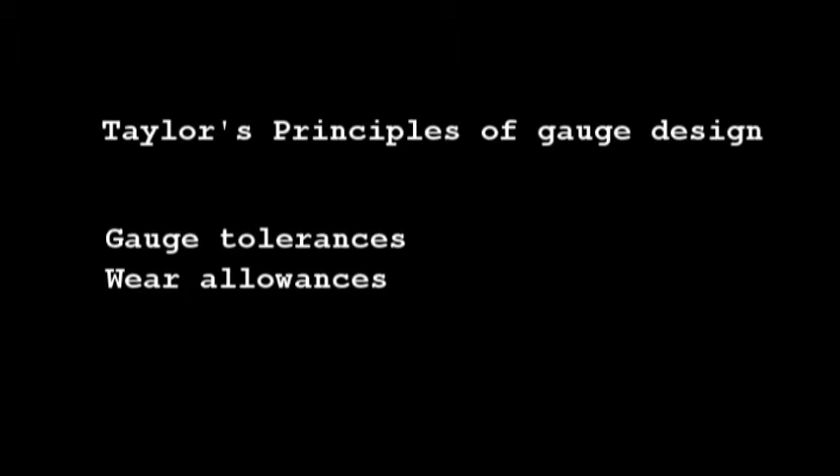So, first of all, we will start with Taylor's principle of gauging. Taylor has given some principles which are useful while designing the gauges. The first principle is that a go gauge will have to check all the dimensions of the workpiece in the maximum metal condition, indicating the presence of the greatest amount of material permitted at a prescribed surface. So it should check the size of the component and also the geometrical shape.

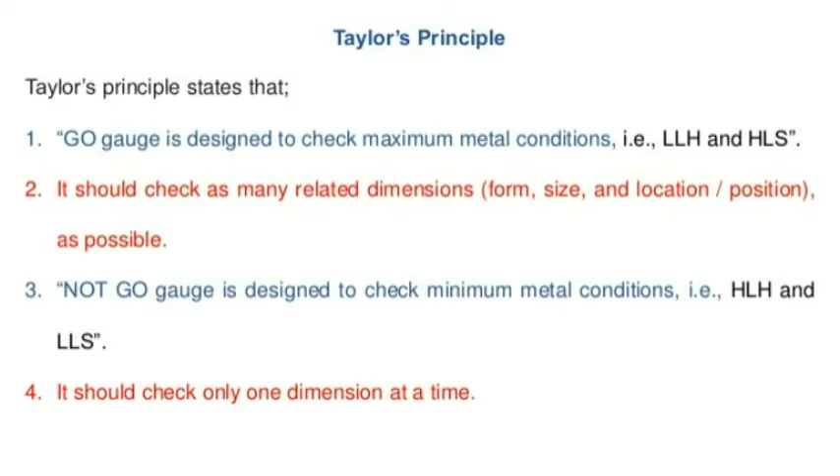Whereas no go gauges will have to check only one dimension of the workpiece at a time for the minimum metal condition, indicating the presence of the least amount of material permitted at a prescribed surface. In case of a hole, the maximum metal condition is obtained when the hole is machined to the lower limit of size, and the minimum metal condition results when the hole is made to the high limit. In case of a shaft, the limits would be the inverse of the hole.

Okay. Now we know that in manufacturing, machining components to the exact size will not be possible. It will be very difficult and very expensive. So, to achieve economy and to meet the function, some manufacturing tolerances are provided on the work parts. Similarly, gauges, like any other engineering components, need manufacturing tolerances to achieve economical production.

So in case of gauges, some tolerance is also provided, which is known as gauge maker's tolerance. It is always very expensive to produce the gauges exactly to the maximum and minimum metal limits of the workpieces as suggested by the gauge designer. So in order to achieve economy, some modification is allowed for reasonable imperfection in the workmanship of the gauge maker. This tolerance provided on gauges is called gauge maker's tolerance.

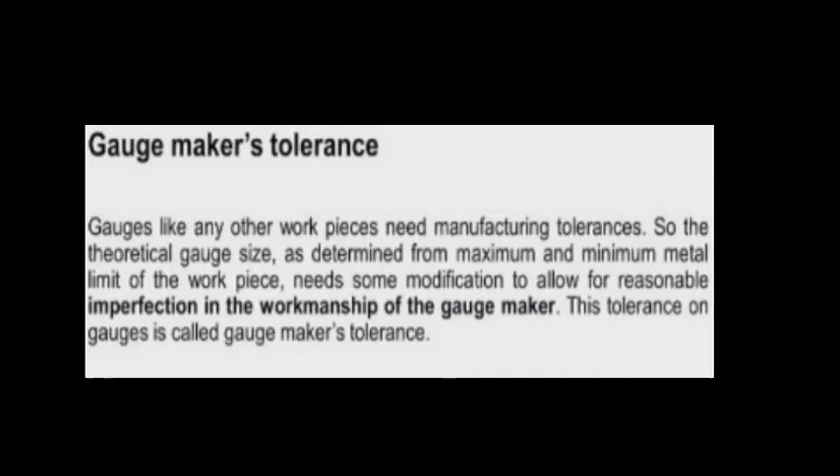Now this is the American gauge design standard. They specify different classes of tolerances for plug and ring gauges only. The different classes are XX, X, Y, Z, and ZZ; the ZZ class is applicable only for ground ring gauges. XX are very precise lapped gauges used as masters. X and Y are used as inspection gauges, and Z for normal working gauges.

Now this table shows, for a particular size range, 0.029 inch to 0.825 inch, with all values in inches, what tolerance is allowed. If the gauge is XX class, the tolerance allowed is 0.00002; for X class it is double this value, 0.00004; for Y class it is 0.00007 inches; for Z class 0.0001 inches; and for ZZ it is 0.0002. Similarly, for other ranges of sizes, the tolerance values are mentioned here.

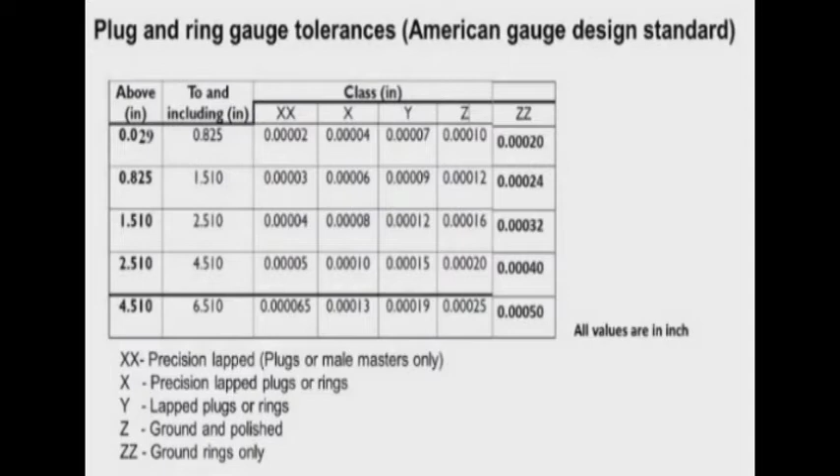Now we will take a simple example to show how the tolerance class can be selected. Let us assume that we have a hole to be gauged with basic size 1.25 inch, plus or minus 0.0006 inch. That is the tolerance provided on the hole.

So the work tolerance, or tolerance spread, will be equal to double this value, that is 0.0012 inch, and in that case the maximum hole size will be 1.2506 inch and the minimum size will be 1.25 minus 0.0006 inch, that is 1.2494 inch.

Now the gauge tolerance, which is normally taken as 10% of the work tolerance. So in this case the work tolerance is 0.0012 inch. So 10% of this will be 0.00012 inch. So if this is the case, from the table we can see for this particular hole and for this gauge tolerance, the nominal size is 1.25 and it falls in this range, and the tolerance spread is 0.00012 inch. So the Z class tolerance is selected. So Z class tolerance zone is selected.

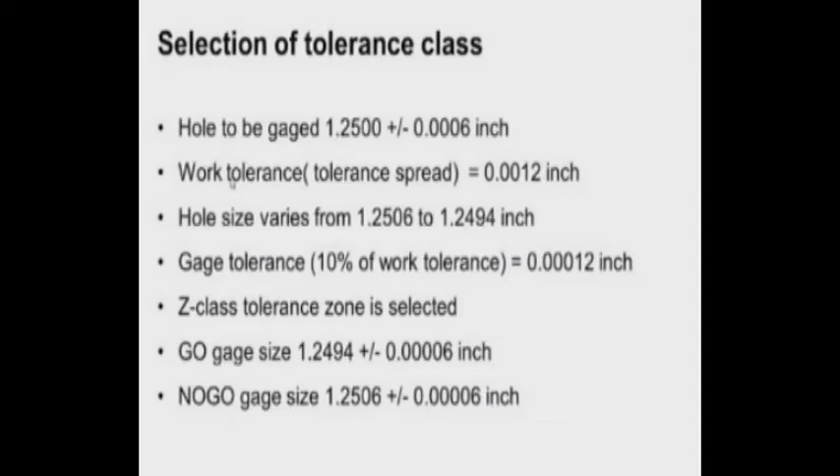Now let us try to understand what is the meaning of wear allowance. In the previous classes we have discussed the uses of gauges, plug gauges, ring gauges, etc., and we understood that limit gauges come in contact with the work pieces. For example, for a hole to be checked, we use a double-ended go no go gauge. So the no go size will be bigger. So this go end will enter into this, and there will be contact between the gauge surface and the work surface.

So there will always be wear occurring on the gauging surfaces. Now in order to prolong the service life of the gauges, wear allowance is added in the direction opposite to the wear. That means when we use this gauge, due to the continuous usage of the gauge, the diameter of the go plug gauge will reduce. That means the direction of wear will be in this direction.

Okay, and if a snap gauge is used to check the diameters, there will be wear of this. So the wear direction will be in this direction, opposite to this particular direction. So in order to increase the service life of the gauges, we have to allow some wear allowance in the direction opposite to the wear direction. See, the wear is occurring in this direction, so we have to add wear allowance in the opposite direction. So in case of snap gauges, wear is occurring in the particular direction. Okay, so wear allowance is given in the opposite direction.

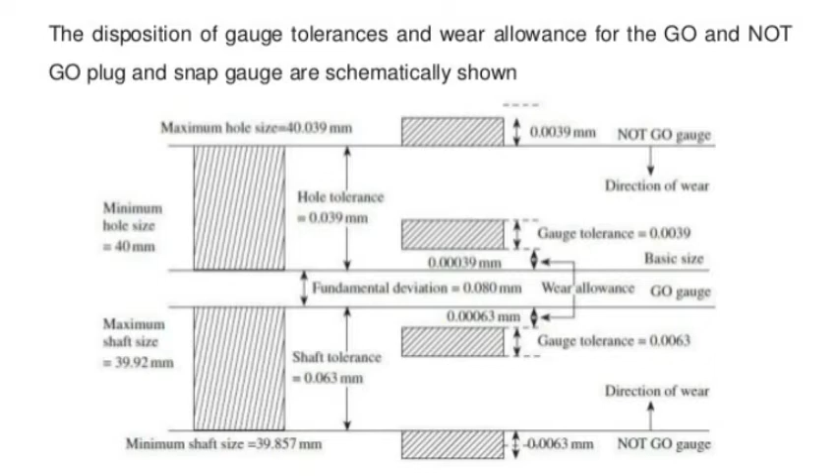So gauge tolerance, what does gauge tolerance mean? In practice, gauges cannot be manufactured to exact sizes. The closer the limits are held, the more expensive the gauge is, and also some variations in size cannot be eliminated due to imperfections in the process, the skill of the worker, etc. So some allowance must therefore be provided to the gauge maker for manufacturing the gauges. Okay, so this is called gauge maker's tolerance or gauge tolerance.

So logically, the gauge tolerance should be kept as small as possible, but this will increase the cost of manufacturing the gauges. So there is no universally accepted policy for the amount of gauge tolerance. Limit gauges are usually provided with a gauge tolerance of 1/10th of the work tolerance. Okay, so the amount of tolerance on the inspection gauges is generally 5% of the work tolerance, and that on the reference or master gauge is generally 10% of the gauge tolerance.

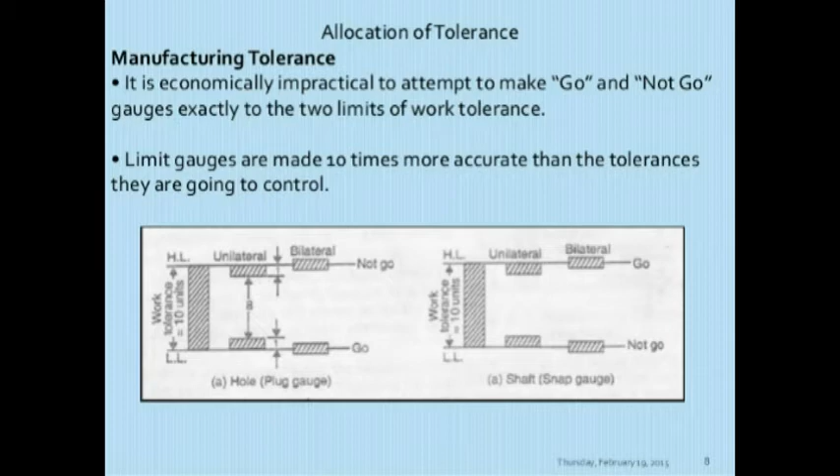Now coming to the disposition or allocation of the gauge tolerance. After the magnitude of gauge tolerance is determined, it must then be positioned relative to the work limits so that it does not cause the gauge to accept defective work. In the modern limit system, the unilateral system of providing tolerance is preferred. In this system, the gauge tolerance zone lies entirely within the work tolerance zone, as shown in this figure.

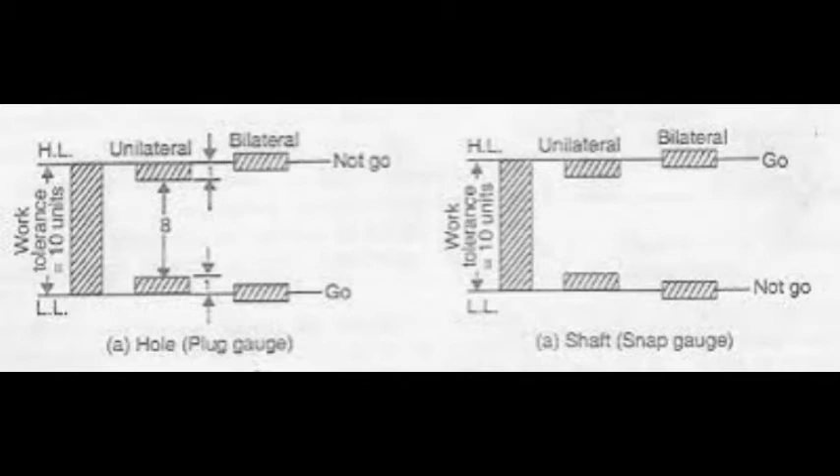Due to this, the work tolerance zone becomes smaller by the sum of the gauge tolerances, but this ensures that every component passed by such a gauge will be within the work tolerance zone. For example, if the size of the hole to be checked is 50 plus or minus 0.02, then the higher limit of the hole is 50.02 mm, the lower limit of the hole is 49.98 mm, and the work tolerance is 0.04 mm.

Therefore, gauge tolerance is equal to 10% of the work tolerance, that is 0.004 mm. So the dimensions of the go plug gauge are 49.98 plus 0.004 minus 0.00. The dimensions of the no go plug gauge are 50.02 plus 0.00 minus 0.004. Observe this: these are the go plug gauge dimensions and no go plug gauge dimensions.

First of all, the basic size of the go plug gauge is the lower limit of the hole. The upper limit, 50.02, is the no go plug gauge. So 0 is common and 0.004 is the tolerance.

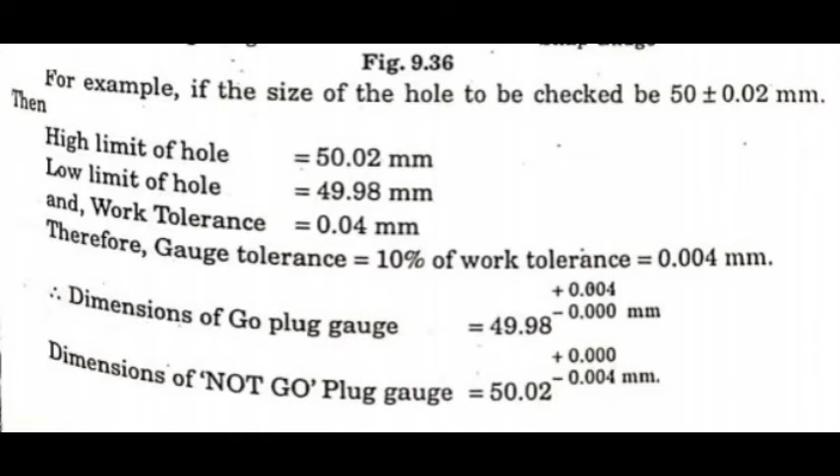And wear allowance. The measuring surfaces of go gauges rub constantly against the surface of the workpieces during checking. This results in wearing of the measuring surfaces of gauges, and the go gauge thus loses its initial size. The size of the go plug gauge is reduced due to wear, and that of the ring or snap gauge is increased. Hence, a wear allowance is provided to the gauges in the direction opposite to that of the wear. I hope everyone understands this wear allowance concept.

Wear allowance is usually taken as 5% of the work tolerance. Wear allowance is applied to the nominal go gauge diameter before the gauge tolerance is applied. According to the British standards, wear allowance is provided when the work tolerance is greater than 0.09 mm. Okay, so take the same example.

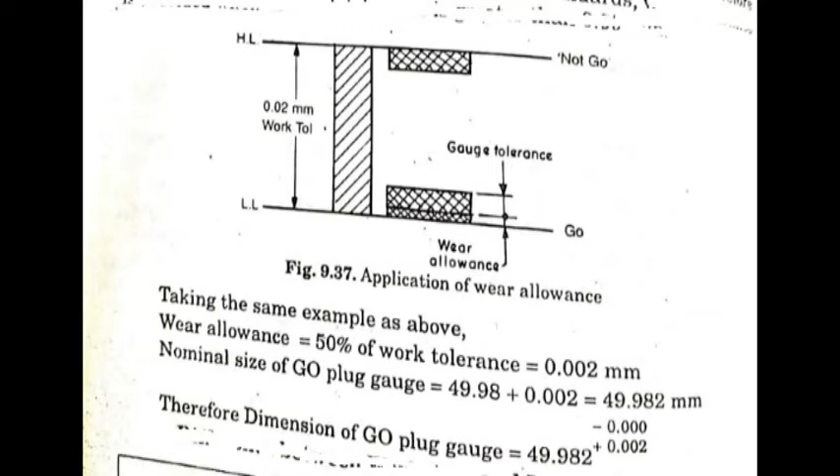Here wear allowance equals 5% of work tolerance, that means 5 by 100 into 0.04, so that equals 0.002 mm. So the nominal size of the go plug gauge is 49.98 plus 0.002, and therefore dimensions of the go plug gauge are 49.982 minus 0.00 plus 0.002. Okay, so this is the clear-cut information about the wear allowance, Taylor's principle of gauge design, gauge tolerance and allocation of gauge tolerances.

Okay, so the gauge tolerance is provided inside the work tolerance. Hence wear allowance is also provided inside, consuming some portion of the work tolerance. Now there is some problem with this method. We are consuming some portion of the work tolerance. The workpiece hole is somewhere here. Actually it is within the work tolerance, so it is acceptable.

But since we are consuming some portion of the work tolerance, the go gauge is designed up to this size. So when we try to insert the go gauge into the hole, it is obstructed. It will not enter, so the operator will decide to reject that particular piece. That is the problem with this type of assigning the gauge tolerance and wear allowance.

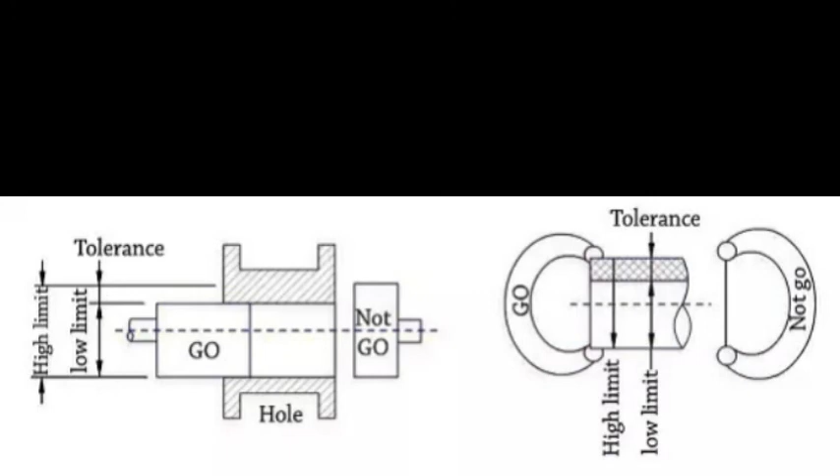Okay, so I hope everyone understands these concepts.